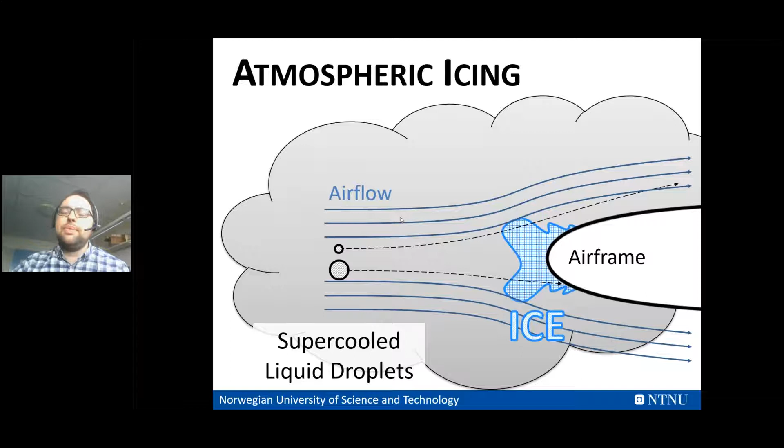So these ice shapes can have a lot of different forms. At very low temperatures, all of the incoming droplets would freeze upon impact and create something that we call rime ice, which typically has a fairly streamlined ice form. Whereas if temperatures are closer to the freezing point, not all of the droplets freeze immediately, but they build a liquid water layer on the surface first, which is then gradually freezing, building something that's called glaze ice or also clear ice.

And the main effects on the aerodynamics from ice are typically an increase in turbulence, leading to potentially quite large separation areas. And what this usually does is it decreases lift and it very substantially increases the drag. And this is very likely to lead to a situation where an aircraft can crash, for example, due to lowered stall margins or just because drag is too high.

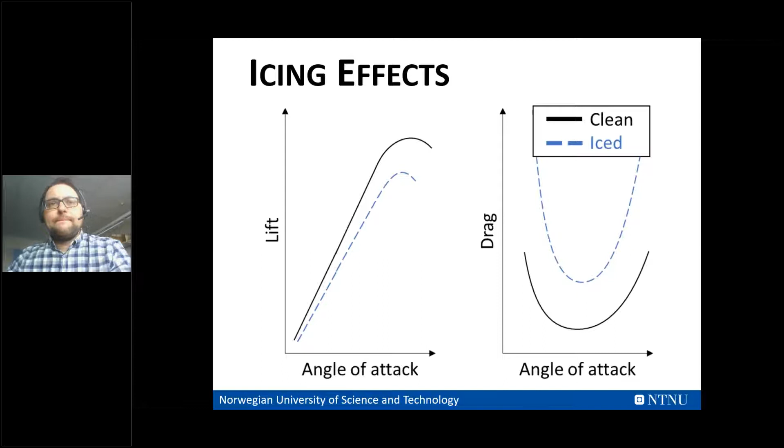The second ice morphology is so-called streamwise ice. Streamwise ice occurs in these rime ice conditions that we've seen earlier. It's usually looking quite aerodynamic. So the aerodynamic penalties related to this type of ice are usually lower compared to the other ones.

So icing is not actually a new topic. Icing in manned aviation has a long history and has actually been explored since as early as the 1940s, 1950s. And today there's a very wide research basis and a lot of processes, certification methods and technologies out there that handle icing on manned aircraft. Today, if you fly with a commercial large passenger aircraft, then there's a lot of know-how and a lot of safety measures in there to avoid any complications in icing.

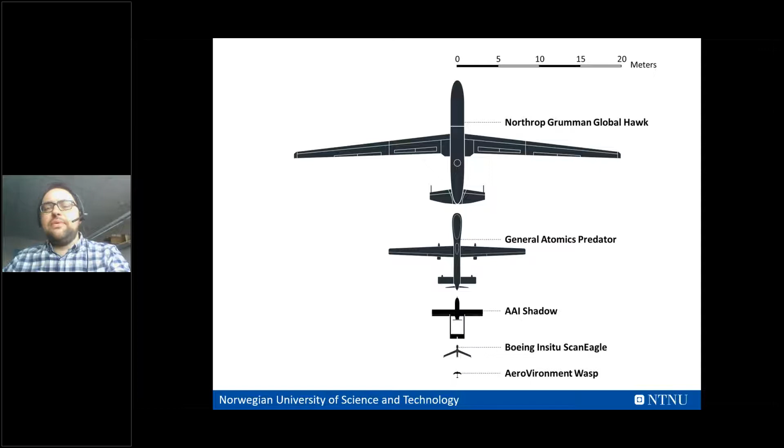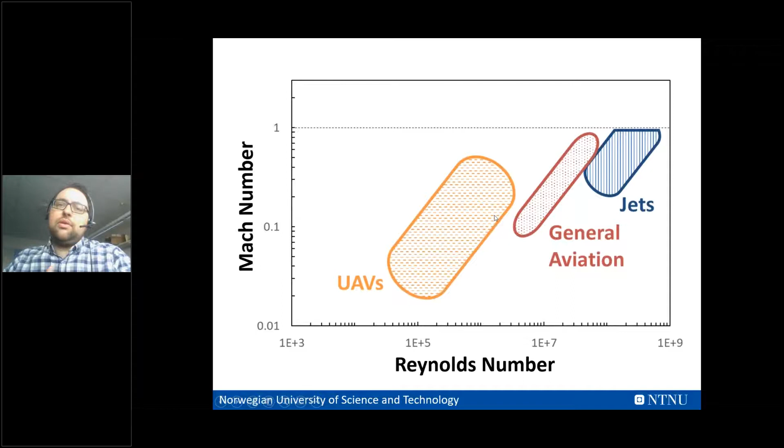All right. The next point is related to the Reynolds number. Again, due to the differences in size and also the velocities that UAVs fly, UAVs are going to be a little bit different from manned aircraft. So in this graph, you can see the Mach number versus the Reynolds number. And typically, you would find jets and general aviation somewhere in the top right corner. And if you plot in this area UAVs, then UAVs, because they're smaller and typically fly slower as well, would be in an area which is at much lower Reynolds numbers and also at lower Mach numbers.

And the main issue arising from this is related to laminar and turbulent flow. So UAVs would typically fly at much lower Reynolds numbers, which means that laminar flow effects would be much more prominent and much more important for them compared to manned aircraft. And when you talk about simulation and also the experiments that have been done to validate these simulations, there's going to be a little bit of a gap, and most of the actual experimental research that we find for manned aviation is performed at Reynolds numbers above approximately 5 million, while a lot of UAVs are actually flying at Reynolds numbers around 1 million or even lower than that.

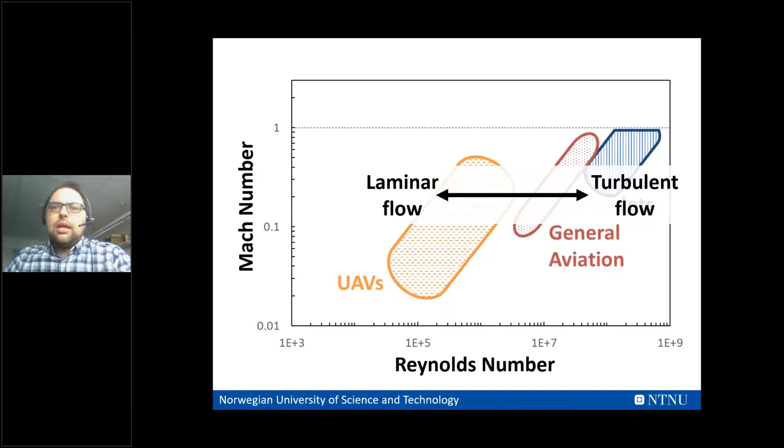Another difference between manned and unmanned is also the icing environments that these aircraft operate in. Manned aircraft, especially passenger airplanes, typically operate below 30,000 feet, and these are also the icing environments that we know a lot about. As I said, a lot of research has been performed for manned aviation, so we kind of know what kind of icing conditions to expect, and we have icing envelopes that we can use to run simulations and to certify the aircraft for this.

UAVs, however, are also likely to fly in conditions where we don't have as much experience when it comes to icing. There might be military UAVs that fly at super high altitudes, while there's also a lot of commercial or smaller applications of UAVs that would fly very close to the ground. And these are icing environments that we don't have too much experience with, and where we also lack, for example, forecasting abilities.

And last but not least, the biggest and most important difference between a manned and an unmanned aircraft is obviously that an unmanned aircraft doesn't have a pilot. So it needs to rely much more on autonomous systems. When we talk about UAVs in icing conditions, this has a couple of implications. First of all, ice detection on a manned aircraft is very often done by the pilot himself. There's different instruments that, of course, aid the pilot, but very often the pilot can see ice accretions on the windows or on parts of the wings himself and make an assessment that now the aircraft is in icing conditions. A UAV typically can't do that and needs to do all of the icing detection fully automated.

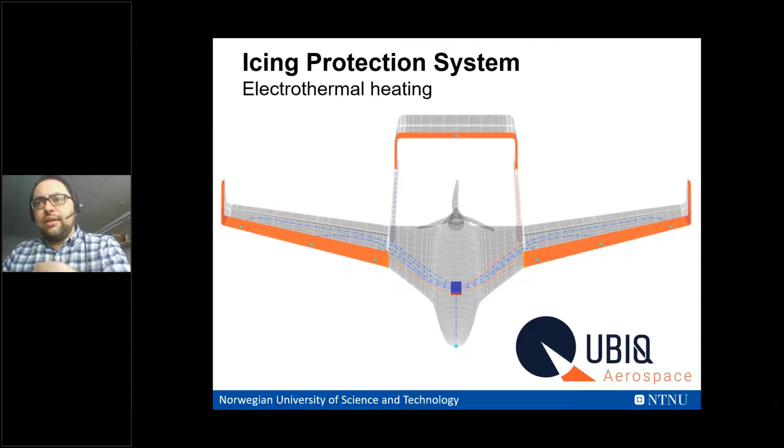So the next part that I want to talk about is how do we actually simulate icing on UAVs or on any aircraft? And there's typically two different parts to this. The first part is to actually simulate the ice shapes. So the goal of this step is basically to simulate what kind of ice would accumulate for a given geometry in some given icing conditions.

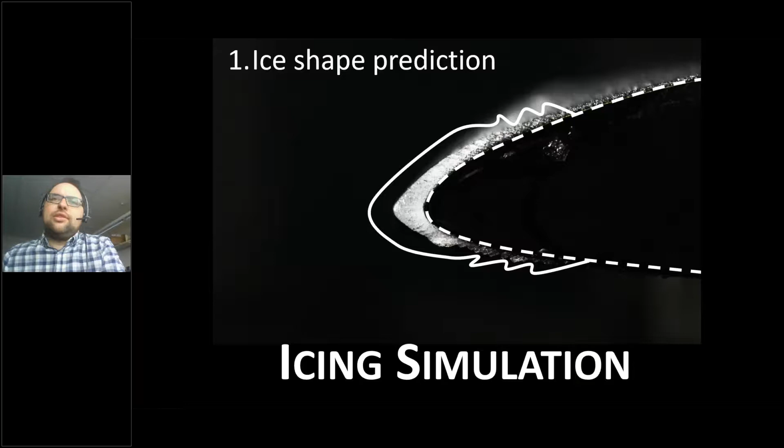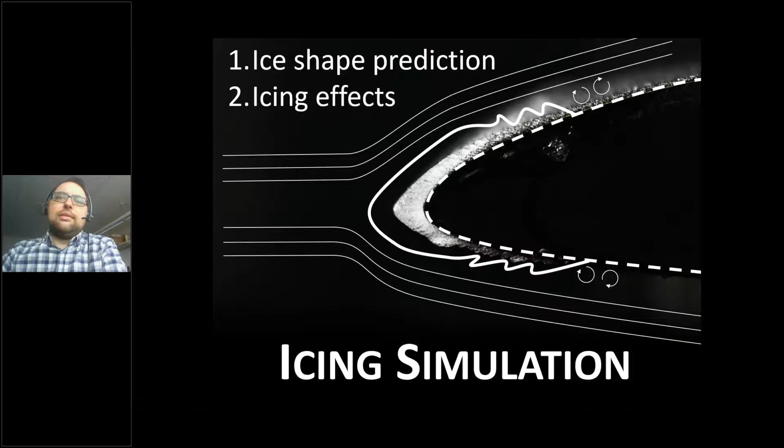And once we have the ice shape, then the next step is to simulate the icing effects. So for a given ice shape, how will this affect drag and lift and moment and so on? And these two icing simulation parts, they go hand in hand, but they're a little bit different in the requirements and in the actual processes. So let's start with the first one, the ice shape prediction.

And there's a lot of different tools out in the market. There's a lot of codes that have been developed over the years. Some simpler tools rely on panel methods. Newer methods, of course, rely on CFD methods. And they all work more or less in the same way. So I'm just going to walk you through the basics of how these tools operate.

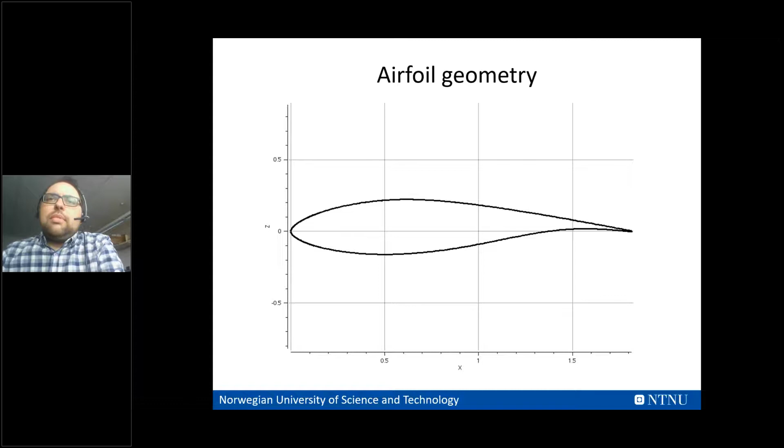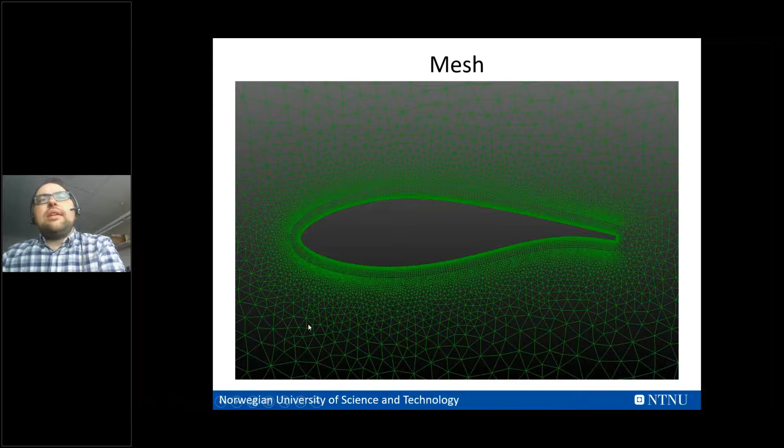So typically, you start with, for example, a 2D clean airfoil geometry. And then you have to put some kind of a numerical mesh around this. So you have to do a meshing. And with this mesh, you would then calculate the flow field around this airfoil. So with this flow solution, you have an idea of the aerodynamic forces and the aerodynamic field around this airfoil, which is going to affect the droplets.

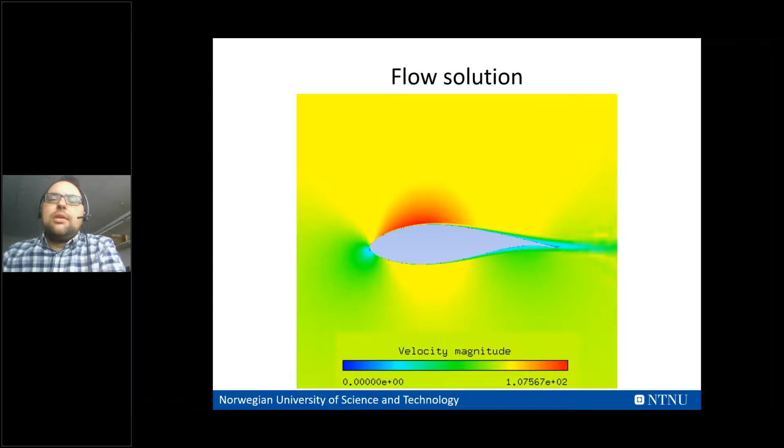So the next thing is that you want to simulate the droplets in the airflow. And there's typically two ways of how this is done. Older codes explicitly calculate a few droplet trajectories and then run a statistical method over, say, 100 droplet trajectories to find out how many droplets would hit the surface of an airfoil and where they would actually hit it.

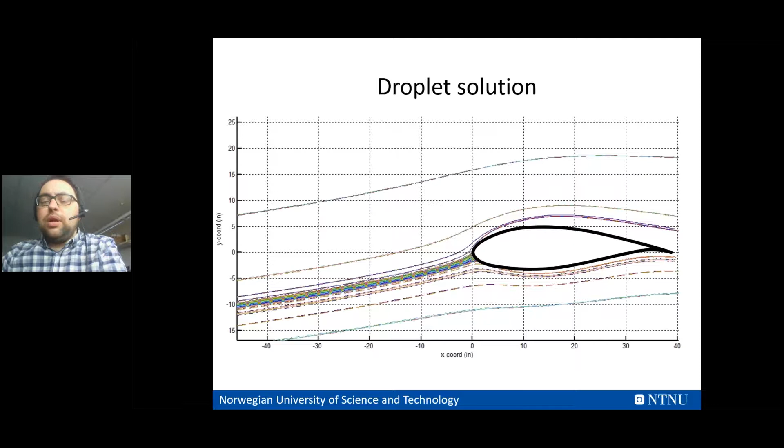With CFD methods, you can actually calculate the complete flow field, and as a result, you get the collection efficiency. The collection efficiency just means how many droplets hit my airfoil and in which area they hit it. So you can see here, the highest collection efficiencies are obtained very close to the leading edge, and everything which is blue on the right side, that's the area where no droplets are actually hitting the airfoil.

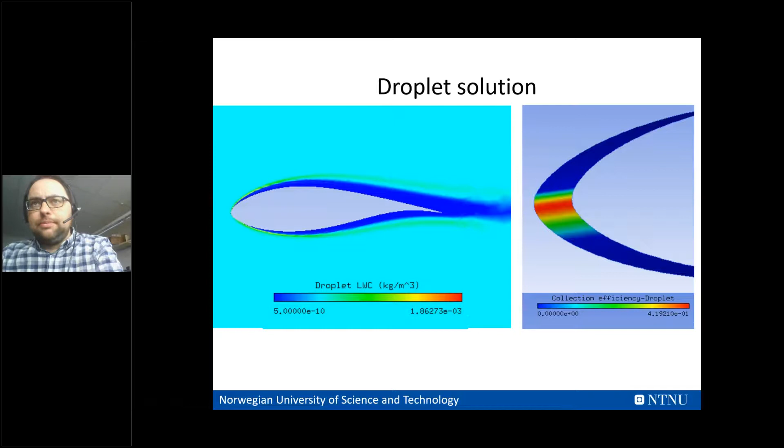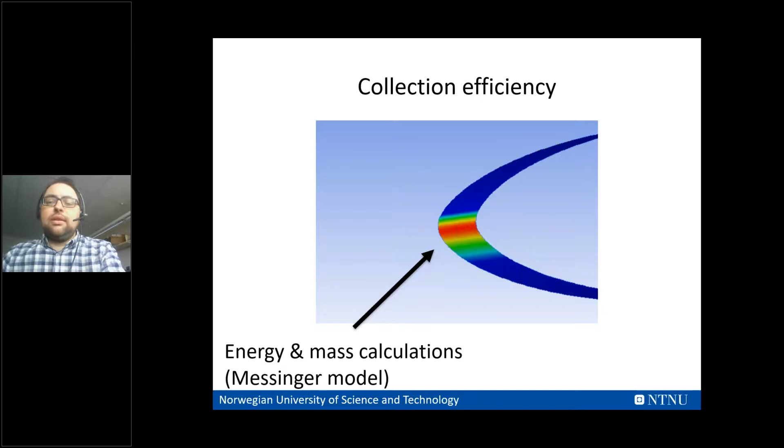So based on this knowledge that we know now where the droplets are and how much water we have on the airfoil, we can then start to calculate the ice shapes. For this, we have to solve several energy and mass calculations. There's something called the Messinger model that allows us to basically calculate, for the given amount of water that we have on the surface, how much ice we get. And this is then going to be an iterative process.

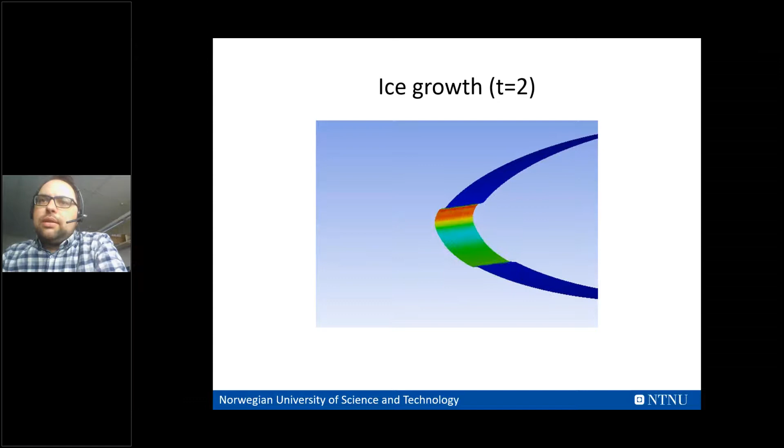So the icing process is divided into different discrete time steps, which are then iterated through. As you can see here, this would be the ice growth in step 1, step 2, step 3, step 4. In between each of these steps, this entire cycle has to be continued, because after each ice growth step, the airfoil geometry has to be updated, which is now an iced airfoil, which you have to mesh again, and then you have to calculate the flow solution on the iced airfoil, the droplet solution, and then the ice growth, and this is how you iterate through the different icing steps.

Now, in the past, the step of meshing the iced airfoils has actually been the limiting factor when it comes to these icing simulations. The reason is that to accurately simulate an icing scenario of maybe 20 minutes, you would easily have to run maybe 10 steps. So that means that you have to remesh the ice geometry at least 10 times. And then, of course, if you're doing certification of an aircraft, you're not only interested in one certain icing scenario, but tens or twenties or even more than that. So the numerical effort here has been quite big.

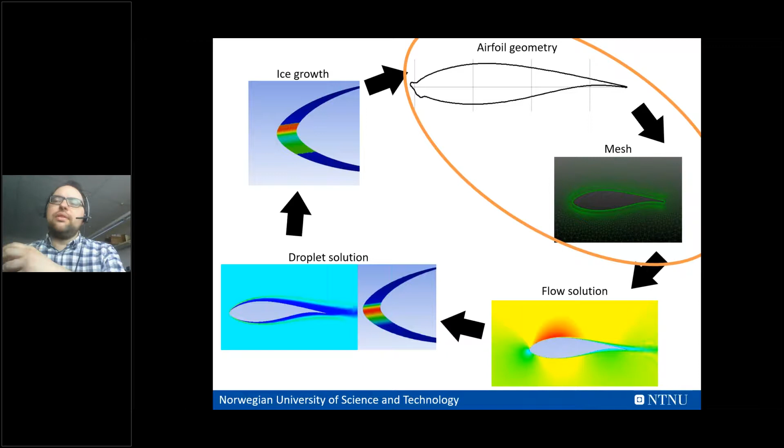So very quickly, people started to develop new methods of how the meshing can be simplified. And there were a lot of different methods out there, partly relying on automated mesh adaptations so that an existing mesh would, for example, wrap around a newly changed geometry. And these systems work very well for simpler icing scenarios. So this is such an example where the existing base mesh has been wrapped around the new geometry. But for more complex geometries or ice shapes, these systems usually failed.

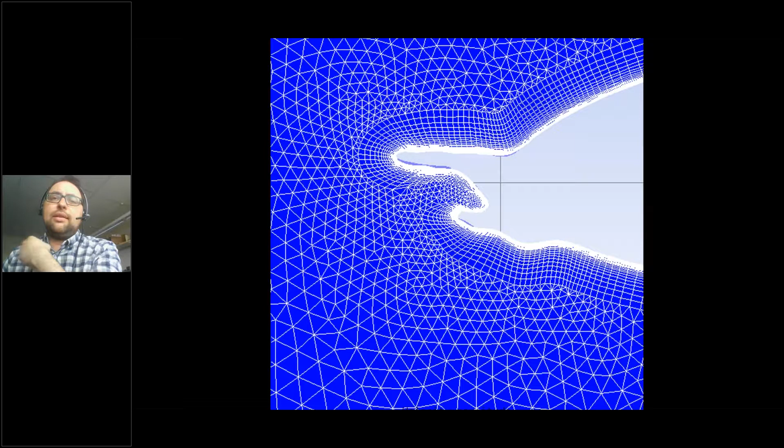Today, these tools are usually able to automatically remesh the entire geometry and start with a fresh, automatically generated mesh every single calculation step. This basically makes icing simulations into a one-click story, while in the past there was always a lot of manual work involved.

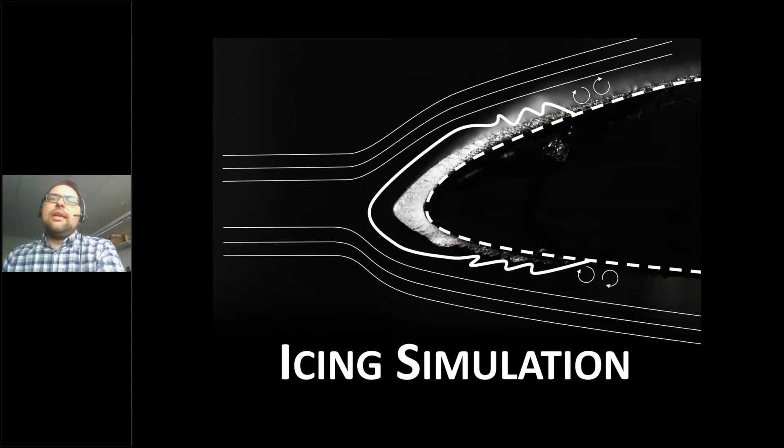So this was ice shape prediction. And then once we have the ice shapes, then we have to simulate the airflow around these ice shapes. And this is typically a little bit of a separate step. And the reason for this is that the requirements for the mesh and the requirements for the flow solution are going to be much, much higher for this type of simulation.

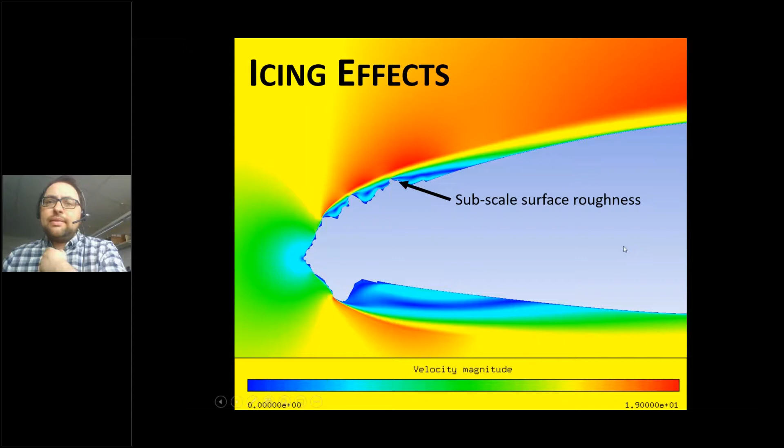And the reason is because there's a lot of icing effects that affect our aerodynamics, right? So first of all, we have a subscale roughness that is affecting turbulence. We have an increase in turbulence due to leading edge separations. We have potentially unsteady flow features. We have laminar effects, we have laminar separation bubbles that can occur. And to capture all of these, we typically need very high quality meshes that we wouldn't obtain from automated systems

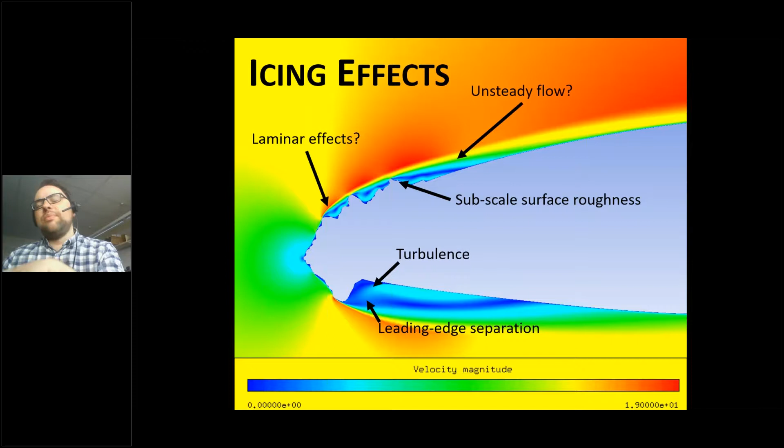that I've discussed before. So we at NTNU, we do work with Pointwise for several years now, and we've seen that we can use Pointwise to mesh these, as you can see, very complex geometries in some cases, relatively easily. In our experience, we are very often using the T-Rex meshes for this type of case. I think this right here, this is an experimental ice shape. So this is an ice shape that we've collected from a wind tunnel experiment.

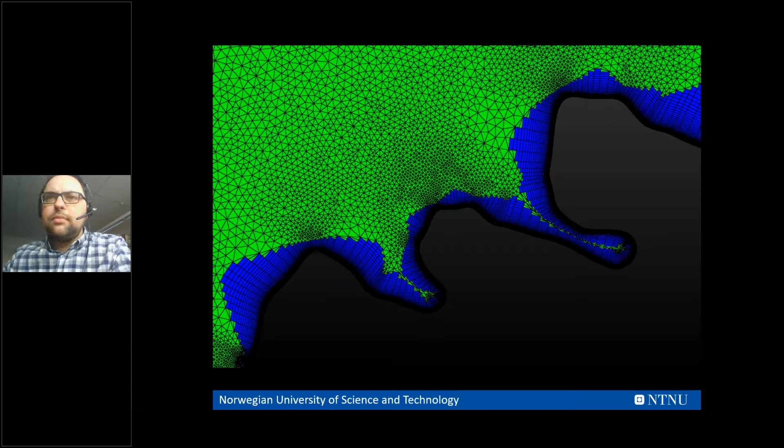And the meshing of such a shape with a T-Rex grid is working very well, and it's also working highly automated, which is then really interesting if you're doing studies where you have to investigate a lot of different meteorological conditions. And this is also one of these results. This is a numerical simulation ice shape. And you can see this is a very complex ice shape. It's very complex structures. And with Pointwise, we're managing to basically resolve this in a one-step solution. And the resulting flow fields are at least sufficient enough for the type of simulations that we're running.

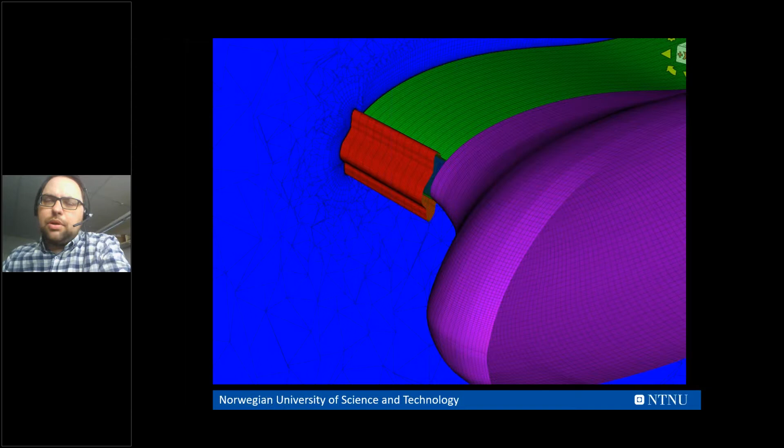So just an example, sorry, we're also using this for 3D simulations in a very similar way. In this case here, this is a UAV where we had an artificial ice shape, so that's why it's so smooth, attached to it, and we had some wind tunnel experiments with this that were accompanied with simulations.

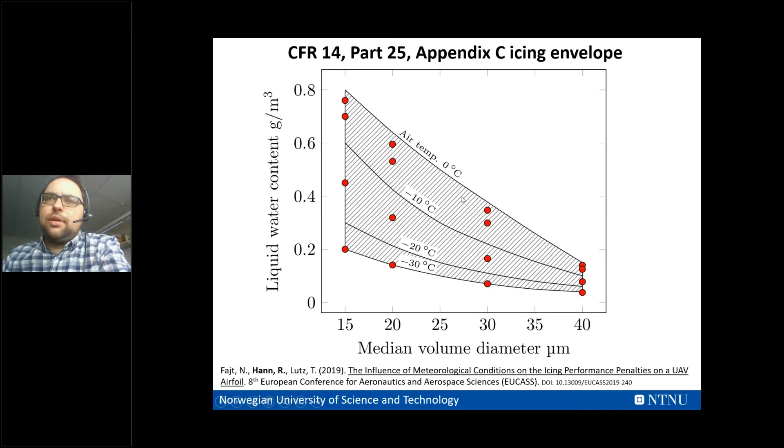the higher the penalties are. So what we could have seen from this work is that the worst icing conditions are actually icing conditions that are very close to the freezing point. Typically, this would be glaze, or also sometimes called mixed ice shapes that, as I said in the beginning, build very complex horn structures, which are then going to have the highest penalties related to them.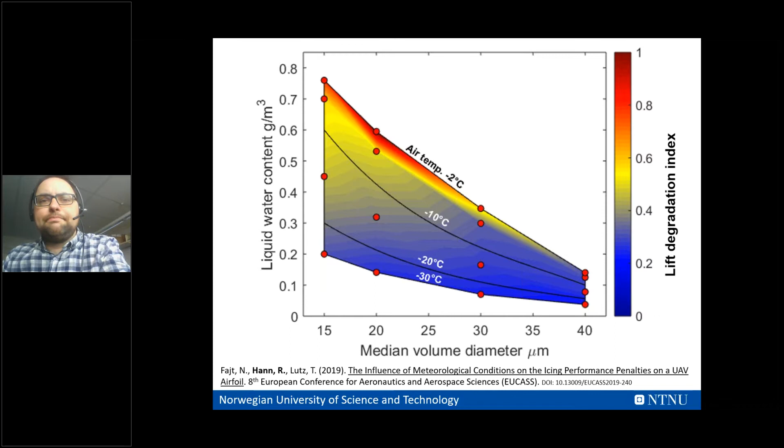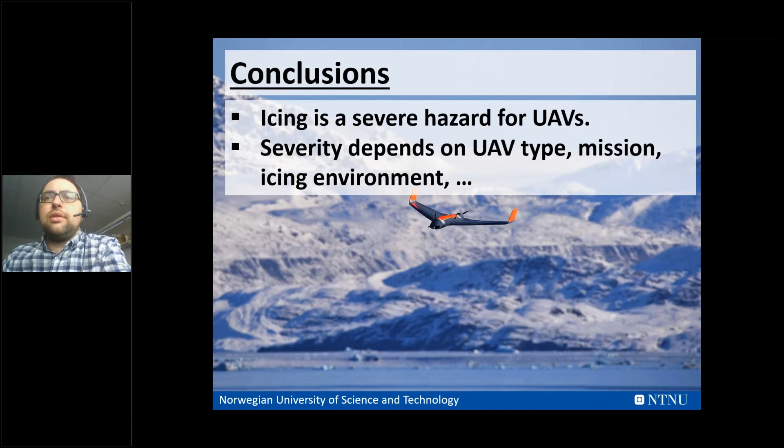Okay, to sum this up, icing is a severe hazard for UAVs, and it's limiting their operational envelope. The severity of an icing condition is very much depending on the type of the UAV, on the mission, on its icing environment, and many more parameters. And especially icing may be much more severe for UAVs than for manned aircraft. This is mainly because of their smaller size, which makes them more sensitive to icing.

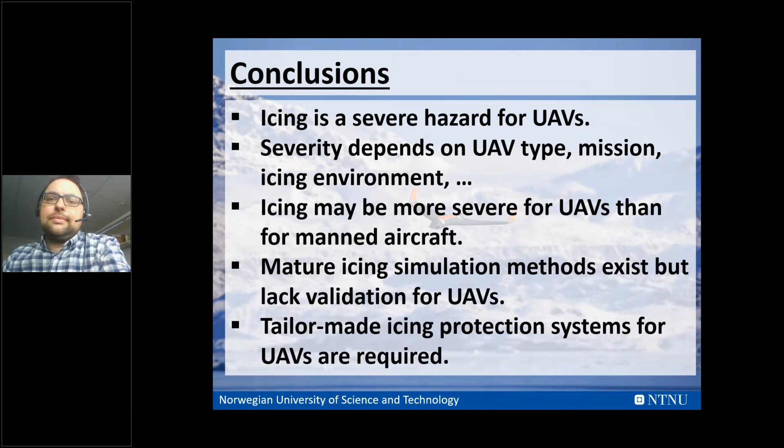And today we're lucky enough that there are mature icing simulation methods out there, but they do lack validation for UAVs. A lot of the tools and methods have been developed for manned aircraft, but have not been validated too much for UAVs yet. And to combat the risks and the hazards from UAV icing, tailor-made icing protection systems are required that very much reflect these differences between manned and unmanned aircraft, and that are well suited to prevent icing on UAVs.